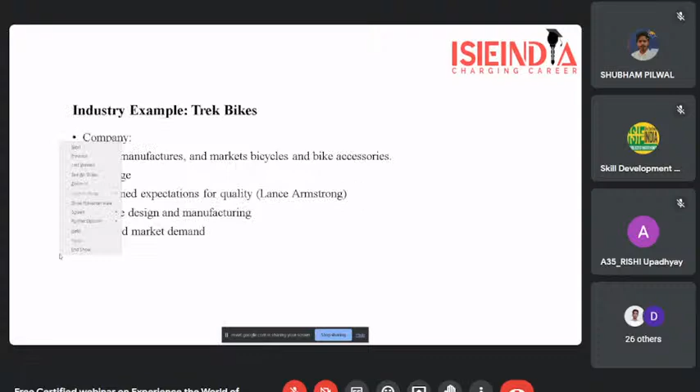No, never mind. Let's go for this thing. Here it will work. Okay.

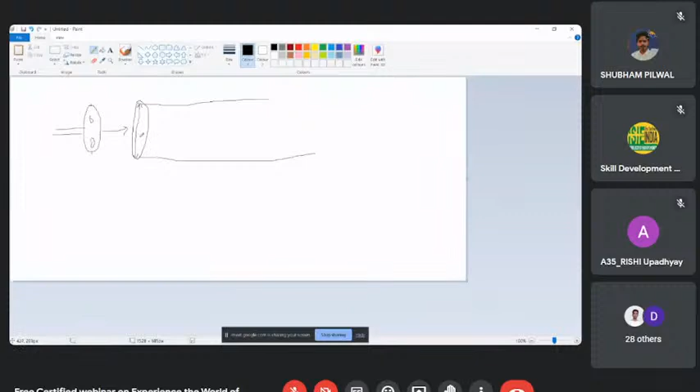SolidWorks is used by everyone, like students, designers, and engineers, all the professionals. I can't even think of any industry where I haven't seen SolidWorks being used.

Let me tell you one thing also, that in programming, people say you need to understand the logic behind the code. The syntax is different in all the programming languages, be it C, Python, C Sharp, Ruby, any programming language. The syntax is different, but the logic should remain the same. Similarly, the design intent should be the same.

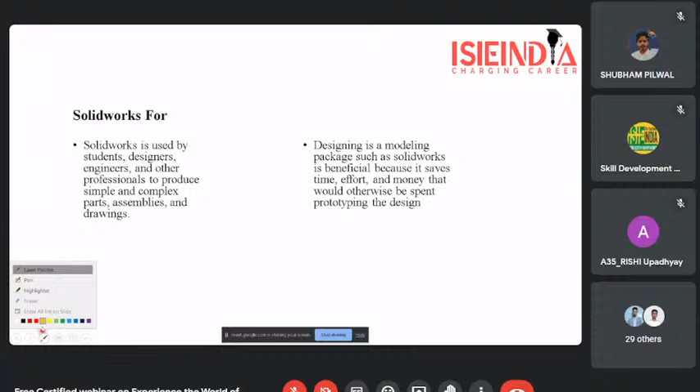Now I'll just give you an example of design intent. Suppose, let's open SolidWorks also, and there I'll tell you what design intent is.

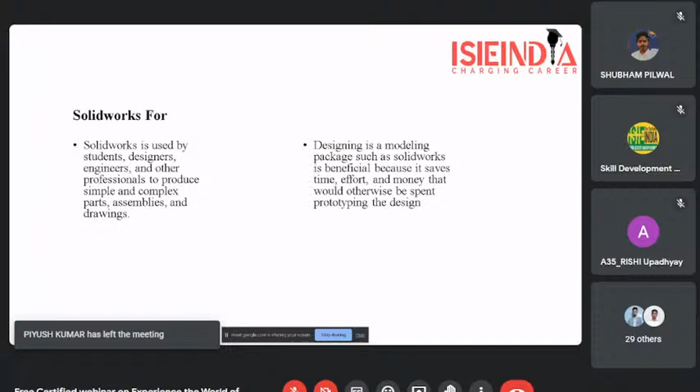Moving on. So other parts of SolidWorks, like it's used for assembling also. You have seen huge plants, like this SolidWorks window when it's opening. Let me reopen this. You can see this entire assembly, this is created in SolidWorks only. So SolidWorks has a lot of potential, and you can do many things in SolidWorks.

Now, these are the sub components. So when SolidWorks starts, this is the starting screen of SolidWorks. It doesn't mean that I can only do these part drawings in SolidWorks. Individual drawings can also be done in SolidWorks, that people usually do in AutoCAD.

Moving on, so SolidWorks part modeling, it's like 2D first, how a part is made. First you have to do a 2D sketch of the thing, and then you use feature commands to convert that 2D into 3D.

And when we have parts, okay, so just first I'll just show this. First is the 2D drawing. In 2D drawing, what I do, I use features. Okay, this is working now, pen is working finally. Nevertheless, so first we do a 2D sketch, and in the sketch we do feature.

What feature is, like you can see, I am right now in SolidWorks. I am opening a part. So here I'll just do it in front of you. I am just drawing a rectangle. This is a rectangle.

Now I am going to this feature bar. There are multiple features that I can do, from extrude, revolve, sweep, and many more.

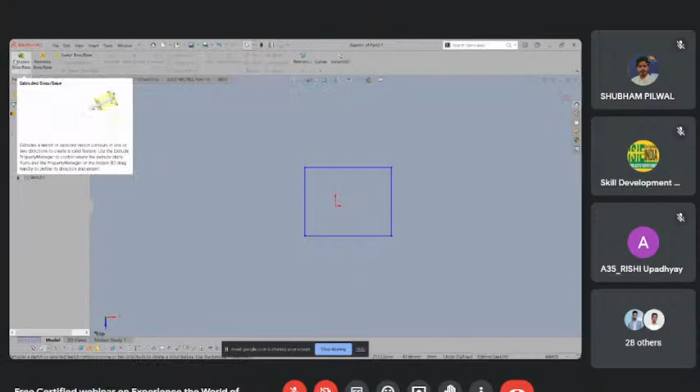Let's go for a simple extrude feature. When I go for extrude feature, this 2D drawing gets converted into 3D. Earlier I just gave a length and breadth to the entire section. Now for converting it, I am giving the height also. I can change the height from here, and voila, this entire 2D drawing is made into 3D.

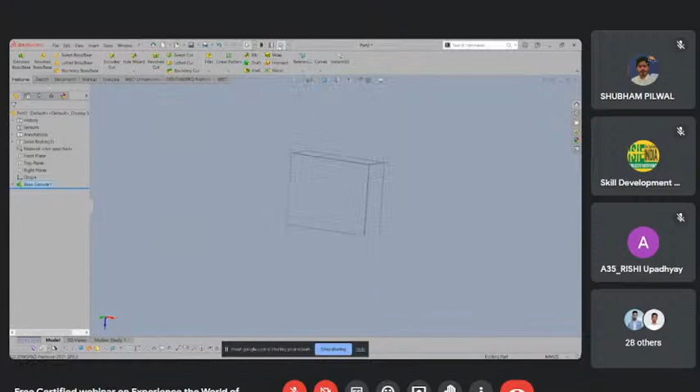For making it more visible, just a second now. I can do this. Okay, no. Drawing, display.

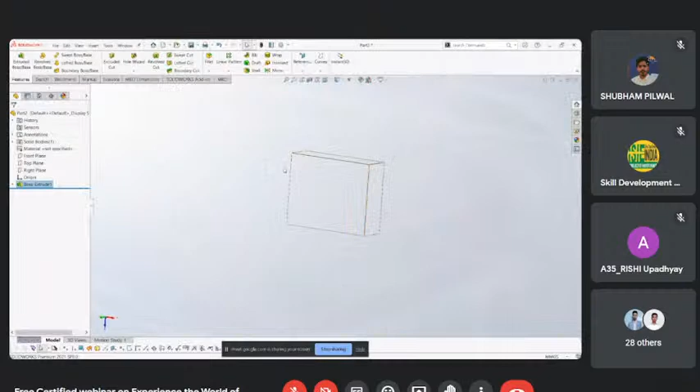Okay, so this is the entire framework which I got in 3D. It has length, breadth, and height.

Now moving on, assemblies. When I have multiple of these 3D drawings, I can do an assembly of these 3D models. And as I've already told you, you can also do drawings. Moving on, this is the SolidWorks interface.

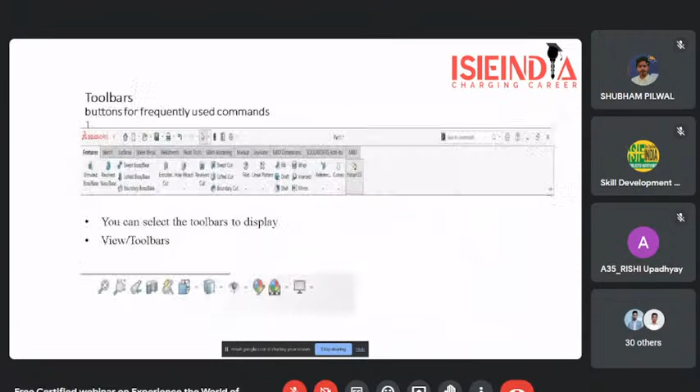We can now do things in SolidWorks itself. So this is the entire interface of SolidWorks. This is the ribbon, the ribbon bar. Here you find all the commands, everything is present over here.

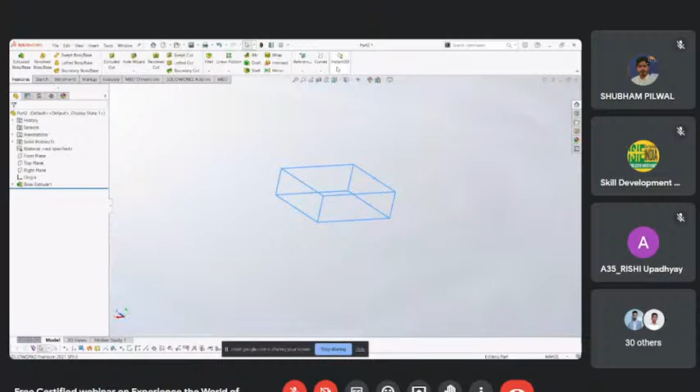This is the feature tree. I've already told you what a feature is — these are the features that we can use in SolidWorks, like boss base, sweep, everything. Which feature do you use? I'll use boss base here, boss extrude over here, so this boss extrude came into the feature tree.

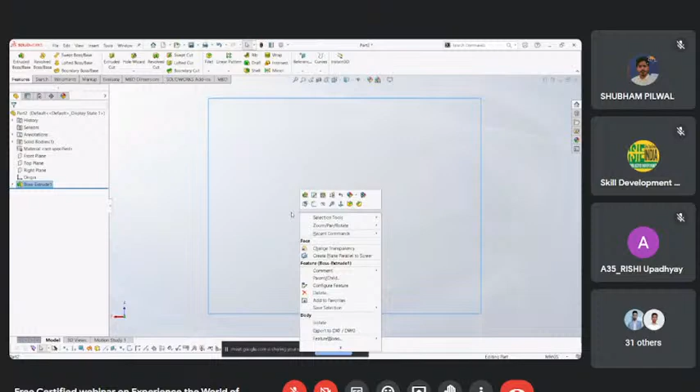If I use any other feature over here, let's say I want to do a hole in here. So what I'm going to do is sketch and create a circle. When I create the circle, I just create an extrude cut. This extrude cut is here — I used another feature, right?

You can see this entire figure — in this figure I have this cuboid, and in the cuboid I have a cut-down circle. So this is the entire 3D. I'll just try to give you a better visualization.

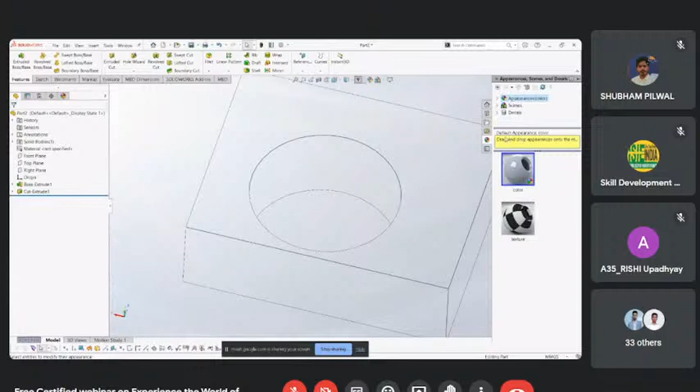Can I continue, Pushkar? Okay, yes, you are back. Okay, yes, moving on, we'll carry on the session. Pushkar, is it visible? No, your screen is not visible. One second. One second, okay.

Now we use the front plane, sketch normal, and we make a rectangle, and go to smart dimension and give the dimension.

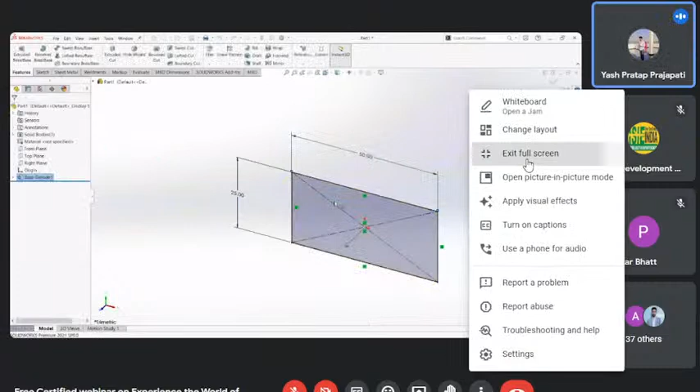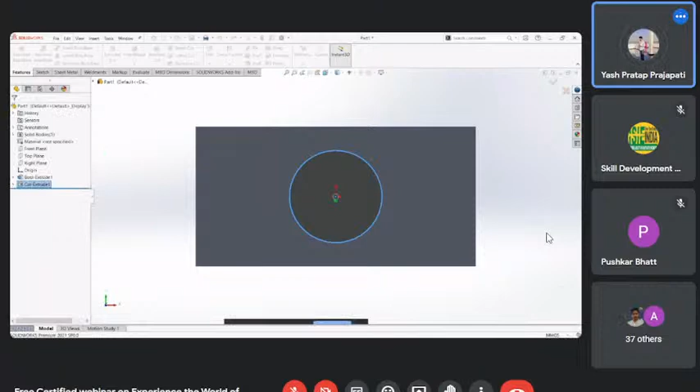And how to use a helix and spiral command: select front plane, sketch normal, and draw a circle.

Hello? Yes, you are audible. Pushkar, am I audible? Okay.

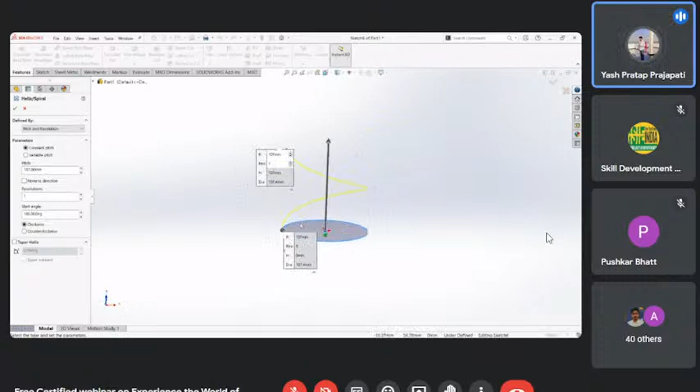Go to the feature and select helix and spiral curve. This is the helix and spiral command. Pitch 107 mm, revolution 15. Click OK.

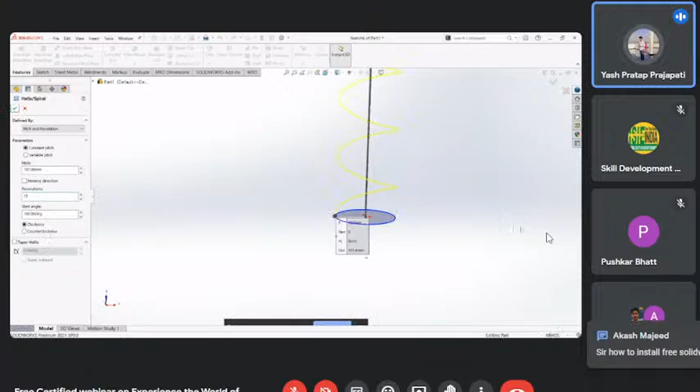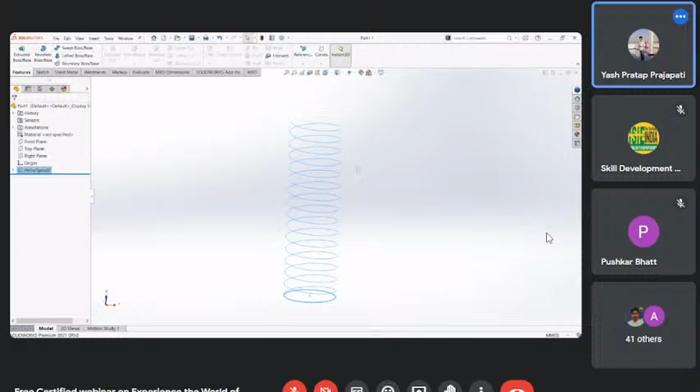Sorry, distress — here we will put 25 mm. Click OK. Go to the sweep boss base command, select circular profile, and create a 3D spring.

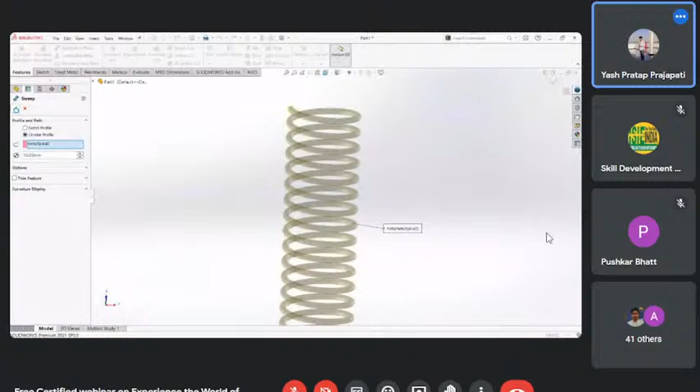If you guys have any questions, then ask me.

Good evening, sir. Good evening. Yes, I want to ask if the SolidWorks available online is free for students on a student license, because otherwise it's a paid course that we have to buy to use. Sorry, your voice is not audible. Hello, hello. Yes, yes. So I'm saying is this SolidWorks version available for free for students, or is it paid? Yes sir, yes it is free.

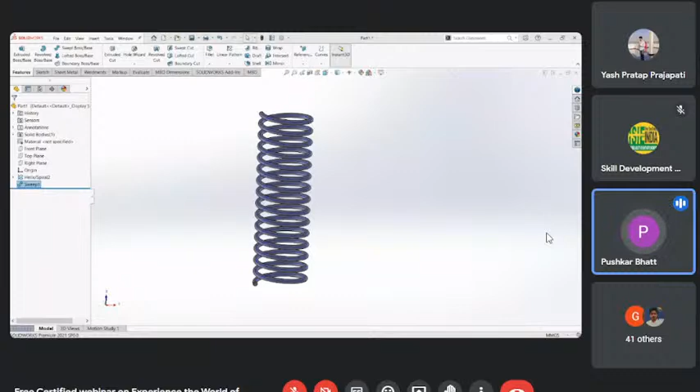Listen, type your doubts in the chat box. Our team is there and will reply to your doubts, and all doubts will be taken after the session. Let Yash finish the session first. Okay. Yash, please continue with the session. Okay.

Okay, so chamfer — how to use chamfer? Chamfer creates a bevel edge on the selected edge and faces. Select front plane, sketch normal, and we make a rectangle. Select feature and go to the extrude boss base command. Click OK.

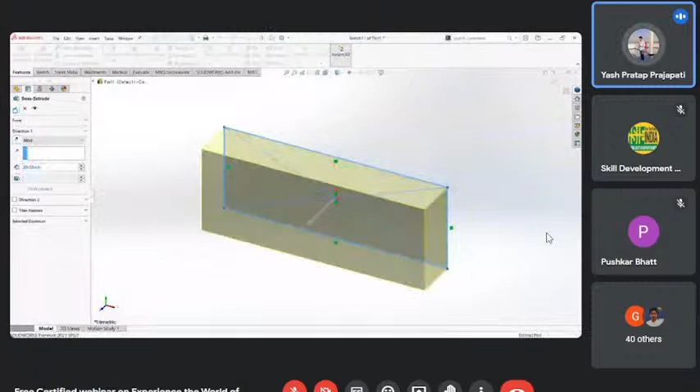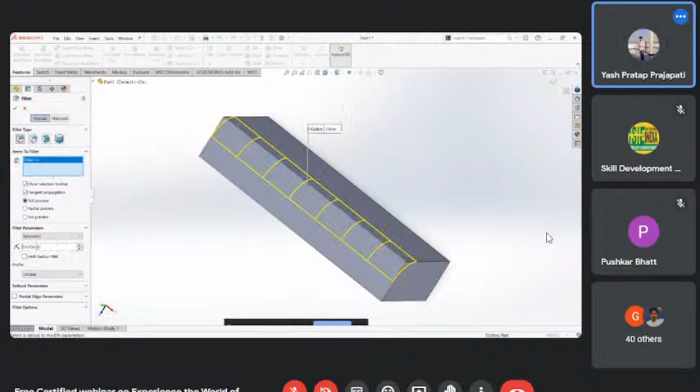Go to the fillet, select any edge of this object, like this. Here we will put 2 mm. Click OK.

Shaded with edges and shaded, okay — this displays a shaded view of the model. Hidden lines visible, and this is wireframe.

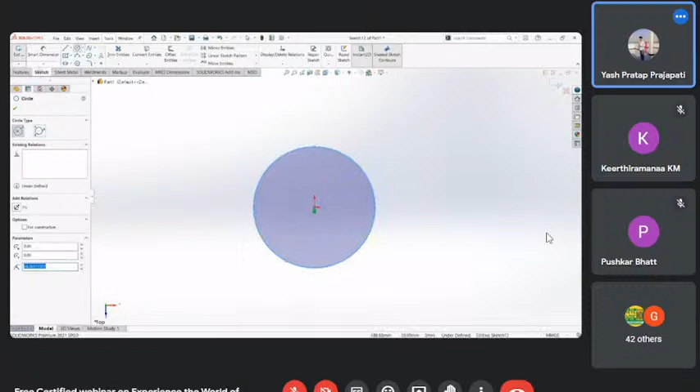Diameter is 45 mm, and extrude it up to 3 mm thickness.

Go to the feature and use the extrude boss command. Here we will put the value 3 mm.

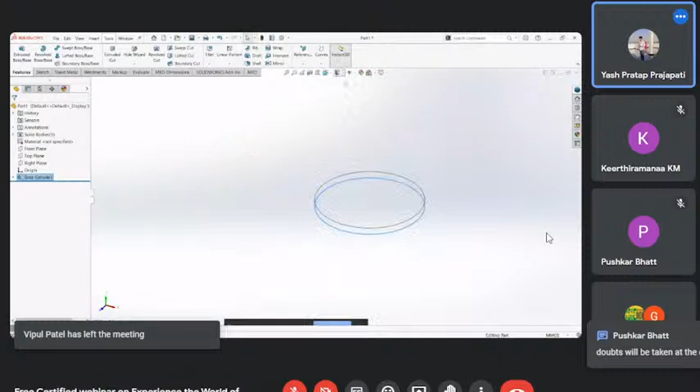Now select the top face and draw a small circle. Let's keep the diameter 10 mm and extrude it up to 70 mm long.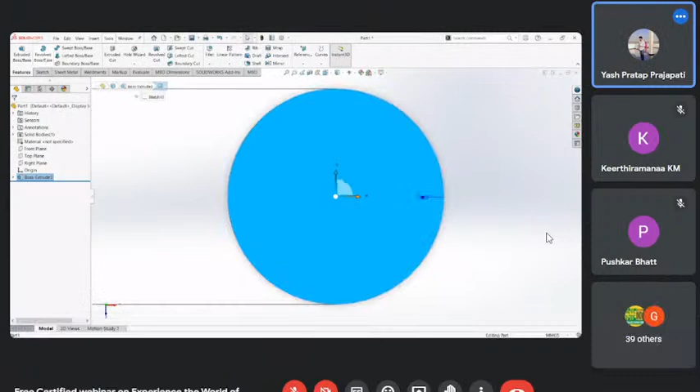Select the face and draw a small circle here.

The diameter is 10 mm and extruded up to 70 mm long.

Go to smart dimension, select the circle, and give the dimension 10 mm.

Go to the feature and use extruded boss base command.

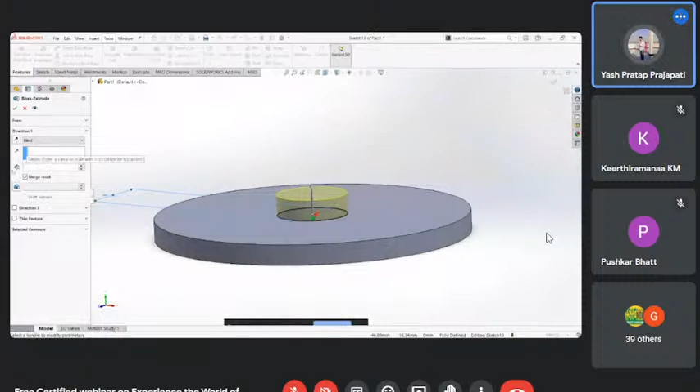Here we will put the value 70 mm long. Click OK.

Now select the back surface and draw one more circle. Keep the diameter 24 mm and extrude it up to 28 mm only.

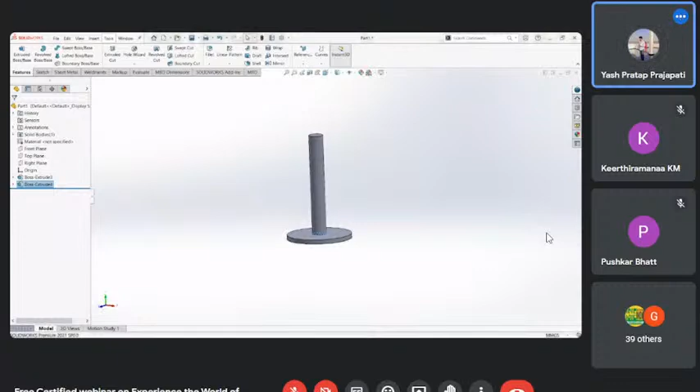Now select the bottom surface, sketch normal.

Select circle, here we draw one more circle. Go to smart dimension and give the dimension as 24 mm.

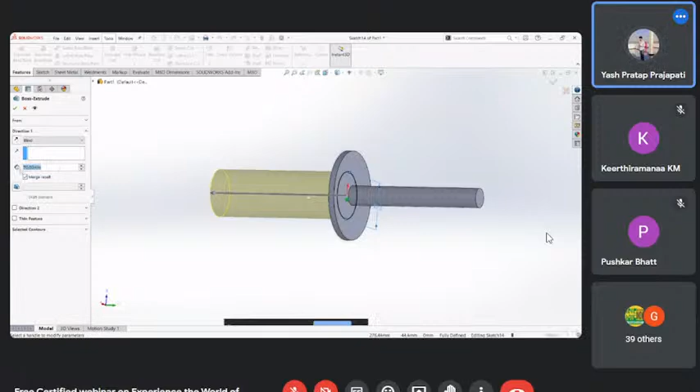Go to the feature and use extruded boss base command. Here we will put 28 mm.

And here we will use fillet chamfer. How do we use chamfer?

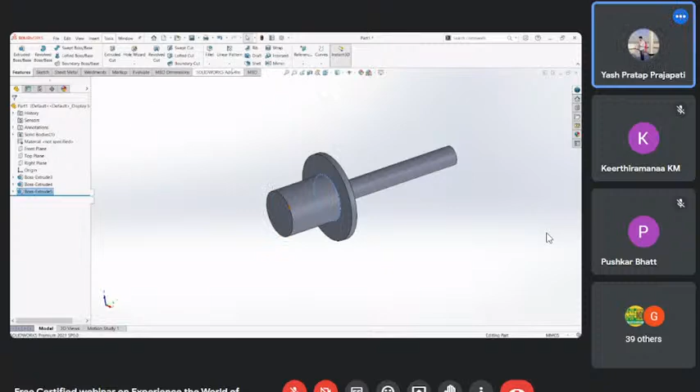Now select fillet, chamfer sorry, and select this edge.

And here we will put 5 mm.

Now select the front plane. Select the center line and make two rectangles. Let's define the gap as 15 mm.

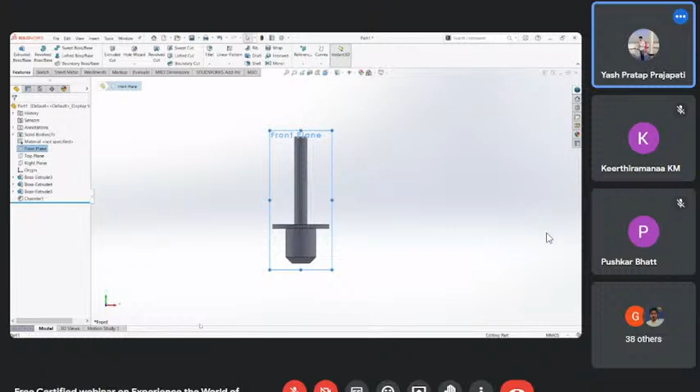Now we will select the front plane, sketch normal, and here we will make two rectangles.

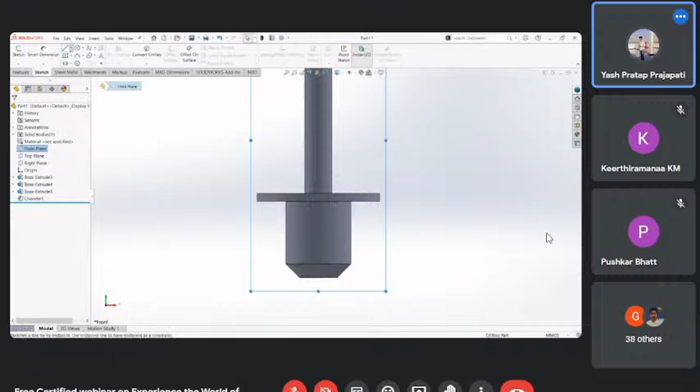Now select the center line, and here we will make a center line.

Height is 20 mm, and width is not defined. Now select extruded cut, select through all in both directions.

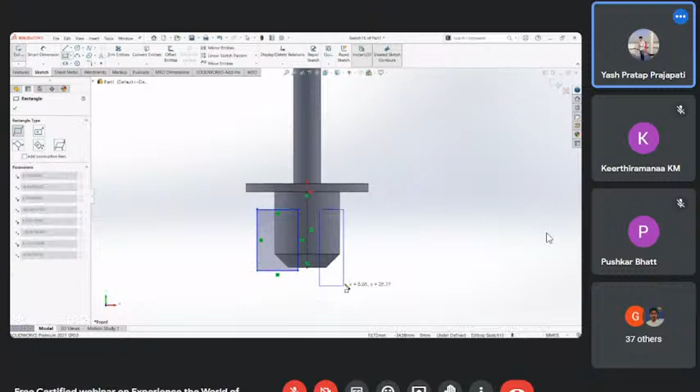And here we will define the gap as 15 mm. Select smart dimension.

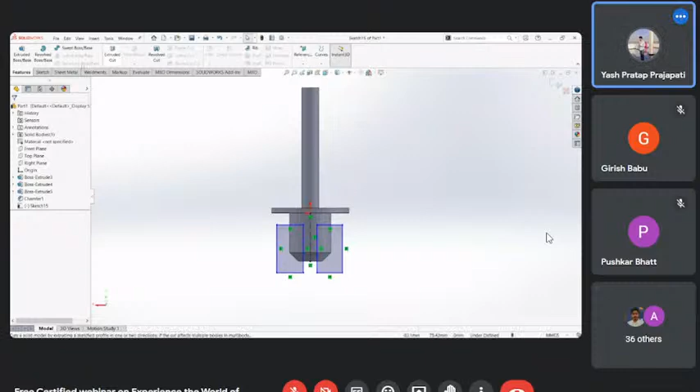Here we will make two rectangles randomly, and select extruded cut, sorry, select extruded cut.

Select through all, select through all in both directions. Click OK.

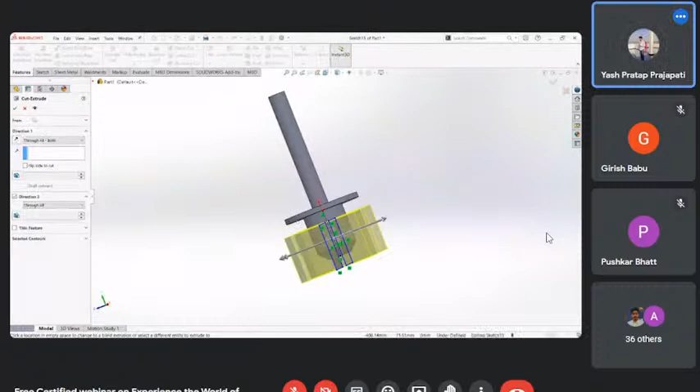So here we will cut this section and select this surface, sketch normal, and here we will create a hole.

Go to smart dimension and give the dimension 8 mm.

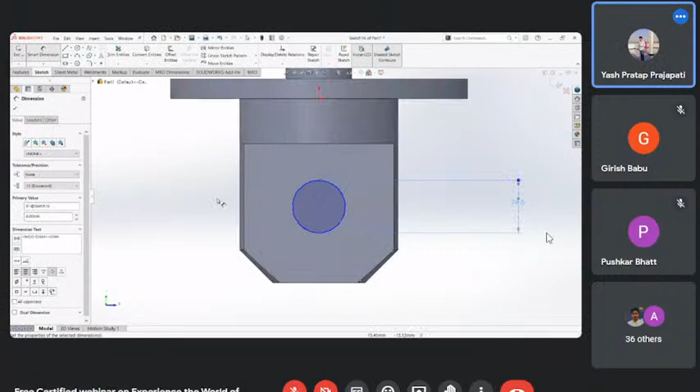Now again give the dimension, select this circle to this point, eight mm.

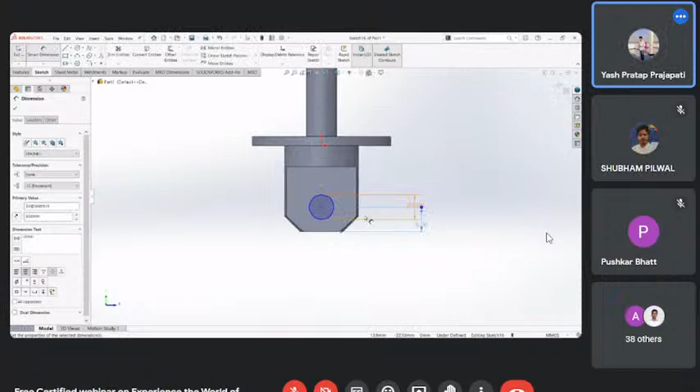Now here we will cut. Go to the feature and extrude cut.

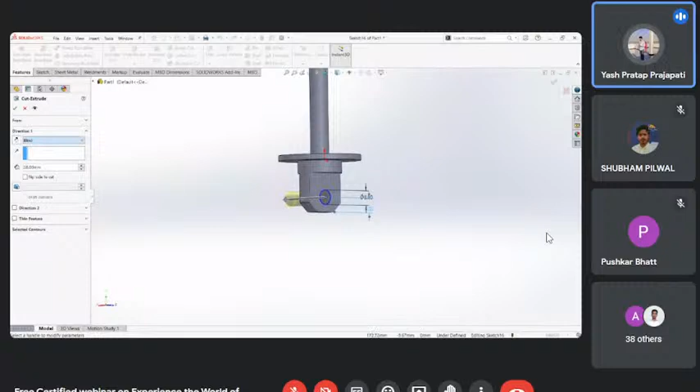Now select through all in both directions. Okay.

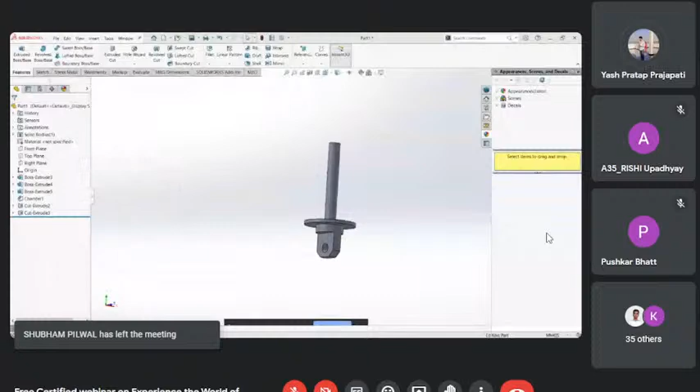Now we select it. There are different types of materials in the design library. We choose metal. Here we select aluminium.

This is top rod. First we will choose the top plane and extrude up to 108.93 mm. Now choose fillet, top edge 6 mm, and select the front plane, draw a center line, choose corner rectangle.

Length is 20 mm. Select the rectangle and mirror about the center line, with a center gap of 15 mm, and select extruded cut through all in both directions.

Select the cut face. First draw a circle, draw a center line and draw a circle of 8 mm, and set the distance of lines from the top line. Keep 10 mm, select extruded cut, and select through all in both directions.

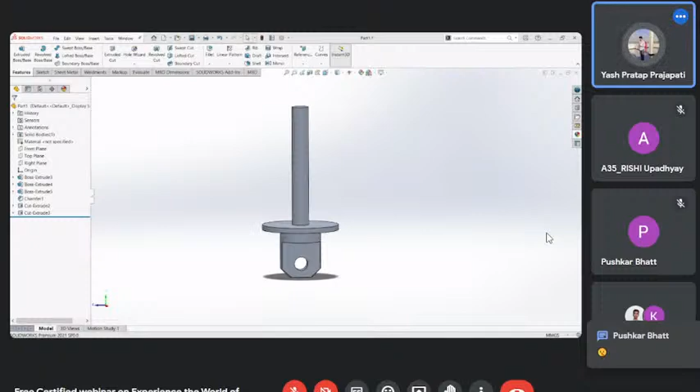Create a thread cut. Select the outer edge, then go to Feature and select Helix and Spiral curve, with height 50 mm and pitch 3 mm. Now select the right plane, select line and draw a rectangle of dimension 2 mm, and draw a center line. Select the point and select this; the path angle of the rectangle is 60°. Then go to Feature and select the Swept Cut command, select the path, and click OK. Now the threads are created.

Check out fasteners in the design library. The design library is in the task pane and has a link to the SolidWorks toolbox, which is included with most versions of SolidWorks. The design library is filled with common components used in mechanical design that are commonly sold by suppliers. The most common use of the design library is for fasteners such as screws, bolts, nuts, set screws, washers, etc. They are all available in the design library, along with different types of tools, gears, etc. And this is the bearing of the top rod.

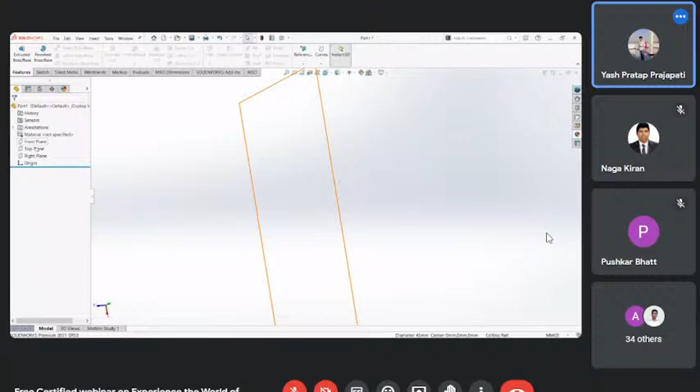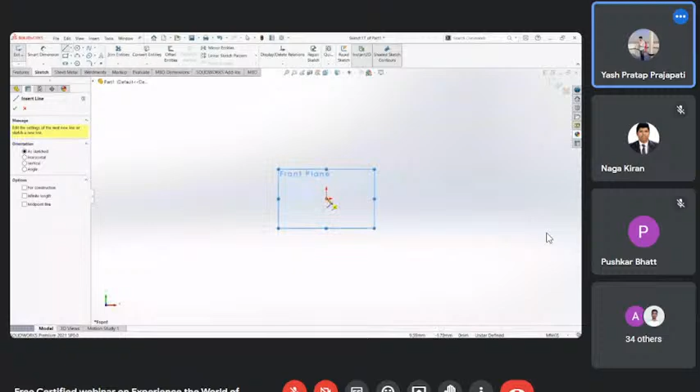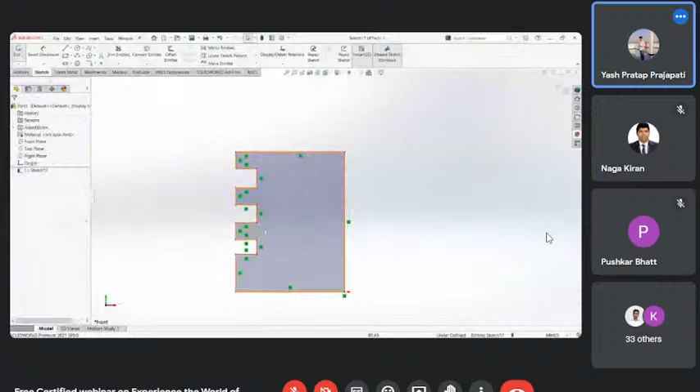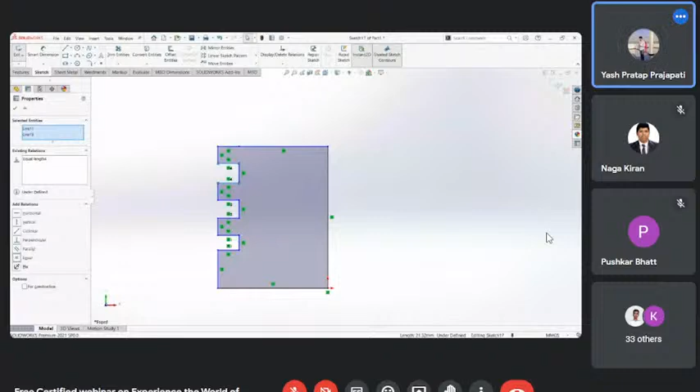Select the front plane, sketch normal. Go to the sketch, select line. Now we will select all the lines and make them equal. Select this line to this line. Go to Feature, select Revolved Boss Base command.

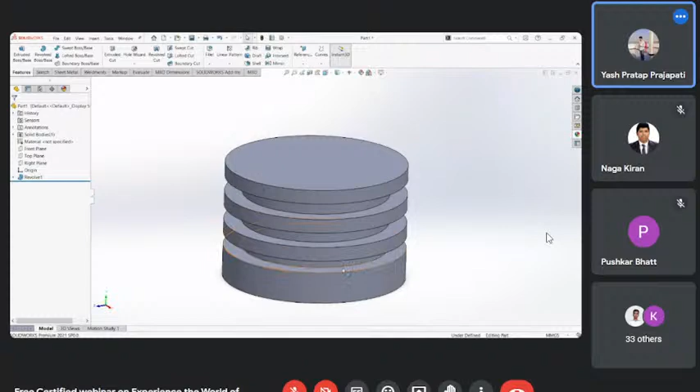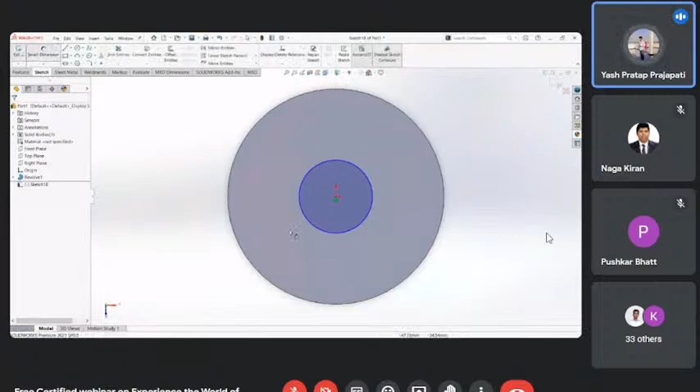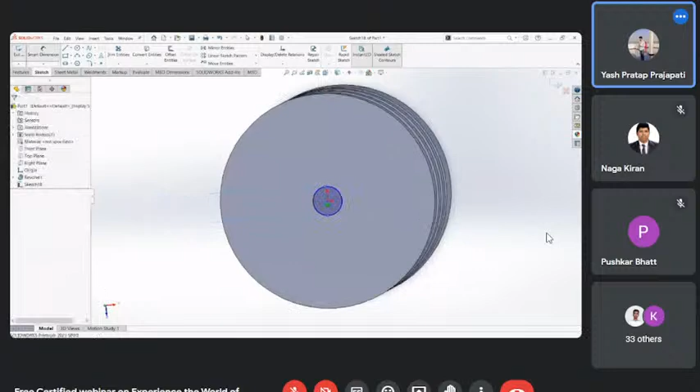Now here we select the surface, sketch normal, and draw a circle. Go to Feature, go to the sketch, and give the dimension 30 mm. Here we will give 60 mm for this rectangle. Select Feature and Extrude Cut. Now we select Through All in both directions. Click OK.

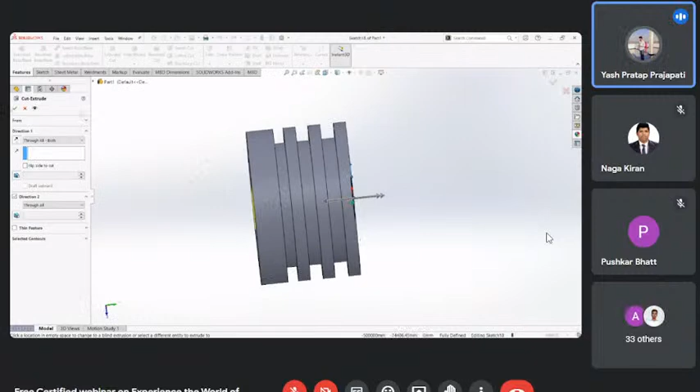We created a full part.

Hello, Pushkar. Yes, yes, you are audible. Okay.

Then go to the Assembly, and here we will cut the components.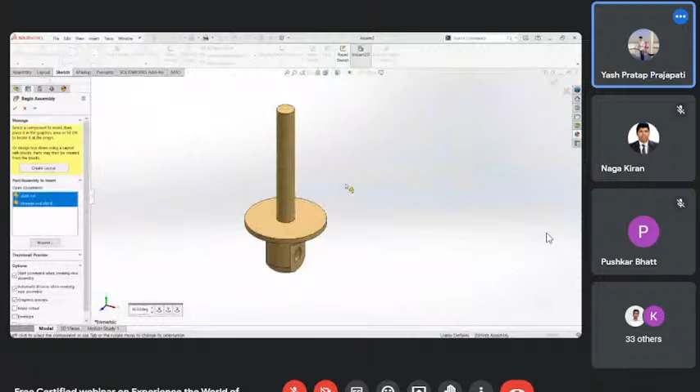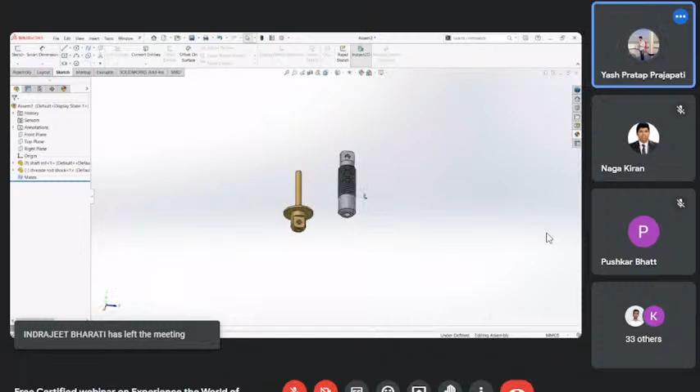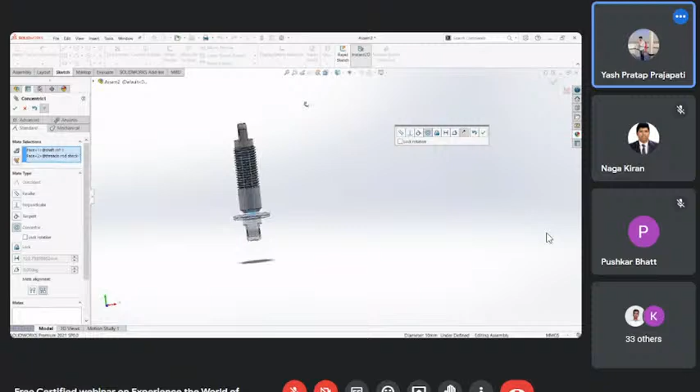The assembly needs two or more parts. So start this rod. Now select this face, this face. And here we will use Mate. The part is assembled. Click OK.

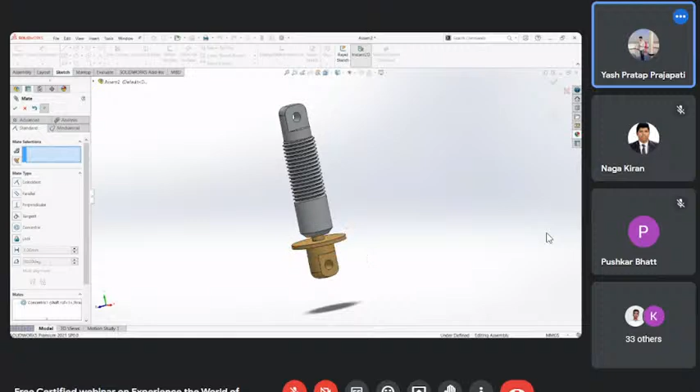Hello. Yes, yes. Yeah, the assembly is done, yes. Yes, the assembly is done. The lecture is over. Okay guys, if you have doubts, then you can ask.

So first of all, Brandon, you were asking about SolidWorks, Inventor, and Pro/E, what's the difference between all these software. So all three of these softwares are CAD modeling software. As I have told you earlier, these softwares are like different programming languages. If you know the logic of how to build these things, the commands are the same in all these softwares. All the sketch commands are there and they are the same. All the feature commands, be it boss, base, extrude, cut, sweep, all the commands are the same. You just need to learn how to create these things, how to use these commands. The rest is just the difference in the graphic user interface. Only the interface changes, but everything else is the same. So don't worry about it. You can start; SolidWorks is an easy software for beginners. It's also widely acceptable worldwide, and most companies use SolidWorks. So you can start with SolidWorks as your first CAD software. Later on, if you want to move, you can go for CATIA and other things. But all these softwares are the same. You just need to know how to develop a design intent first. After you've developed the design intent, you can easily design anything in any software. Don't worry about that.

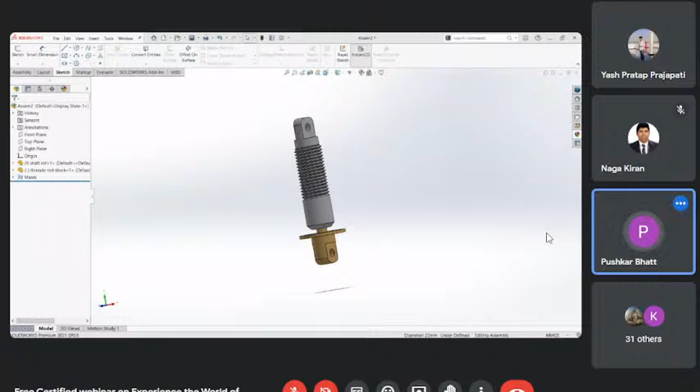Yes, yes, there is a certificate for this course. Okay, we are having doubts. So yeah, is there a certificate for this course? Yes, yes, there is a certificate for this course. You will get the certificate in your email.

3D printing technology works on a file extension named .stl. That stands for stereolithography. So yes, you can save that file that you create in SolidWorks.

SolidWorks' actual extension is .sldprt, which stands for SolidWorks Part. And then you can convert that - have you worked on MS Word? There you get an option for 'save as'. You can either save it as a Word doc file, or you can even save it as PDF.